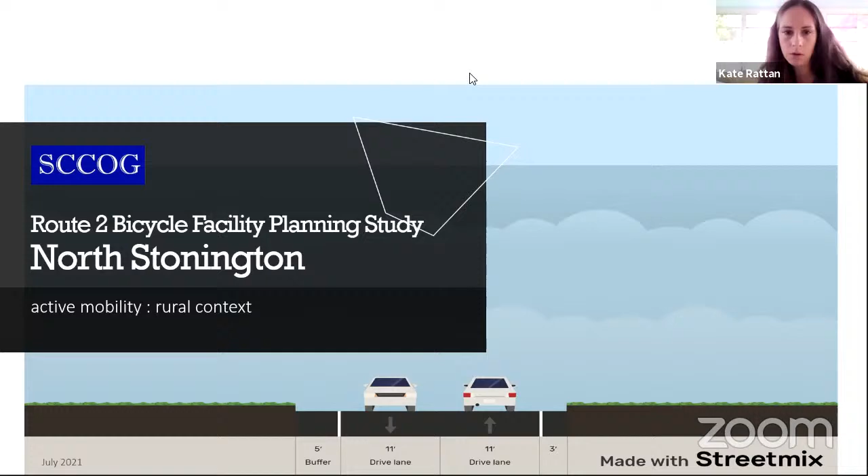Thank you. I'm Kate Rattan from Southeastern Connecticut Council of Governments, and I will start the presentation. We perform the functions of the Regional Metropolitan Transportation Planning Organization, and we are pivotal in trying to program some federal funding for transportation.

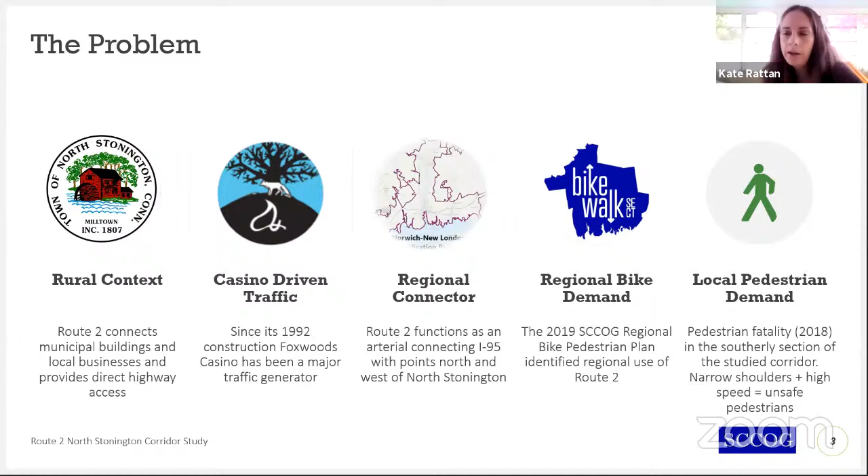This particular project brings together a number of different groups dealing with this problem. We have the town of North Stonington, which is primarily rural. We also have the casino, which is driving a lot of traffic in the region. Route 2 is a regional connector, but we also want to accommodate cyclists, as we saw during our 2019 bicycle and pedestrian plan, and we want to accommodate pedestrians for making local intra-town trips.

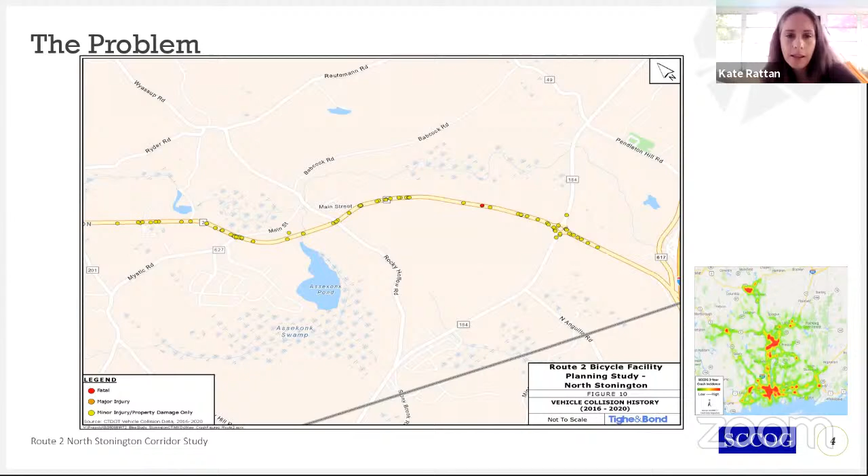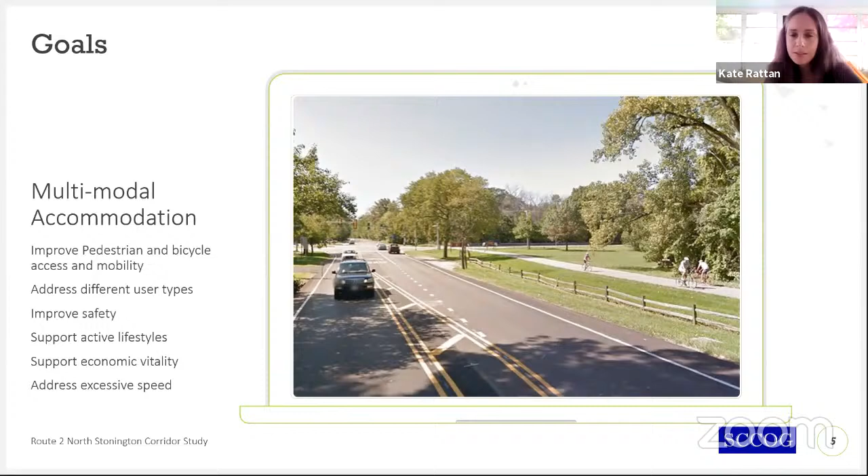Our goal is to provide multimodal mobility that is safe, and that is at times a tall order on Route 2. Some of the challenges are a narrow right-of-way, particularly difficult in the southerly part of the corridor, which extends from 184 up to Holly Green Plaza. We also have utilities along the rights of way, including aerial electric, storm sewer, and gas. Because this is a state route, we have to deal with DOT. They do the plowing predominantly during the winter, and they get to choose what standards we use on that road, but it also performs critical local functions for intra-town mobility.

So you guys are also stakeholders. We have some opportunities. There are some signal upgrades happening now through DOT. We also want to time improvements to make the most of the vendor-in-place paving that DOT does, and make use of any maintenance activities we can get DOT to do. We want to make this corridor more accessible for people to access the natural environment, the recreation offerings you guys have, the schools, businesses, and to create more linkages to enhance economic development.

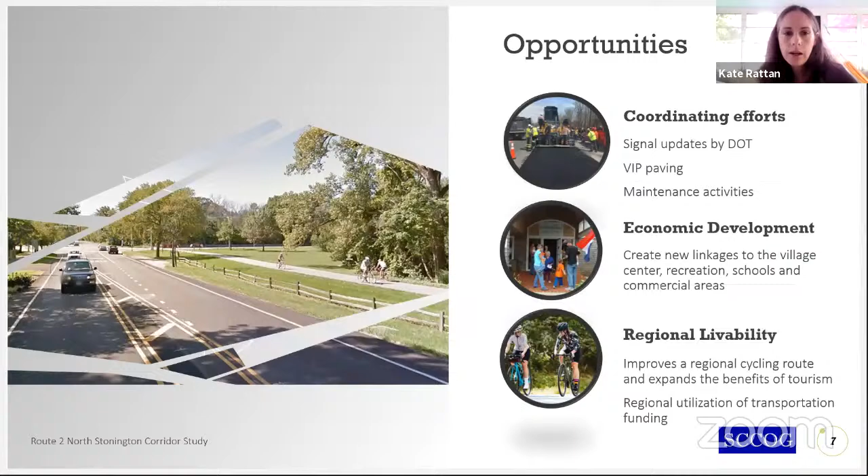We were tasked with this a couple of months ago to look at how we could better accommodate particularly bicyclists and pedestrians. We have to use a multifaceted approach in the central section between the southerly termini of Main Street and the northerly termini of Main Street. That is really a critical area where it should be walkable, and we want to provide a separated path for people and also for cyclists. As you diverge from that area, we think most people can be accommodated with a wider shoulder made safe through the use of buffering.

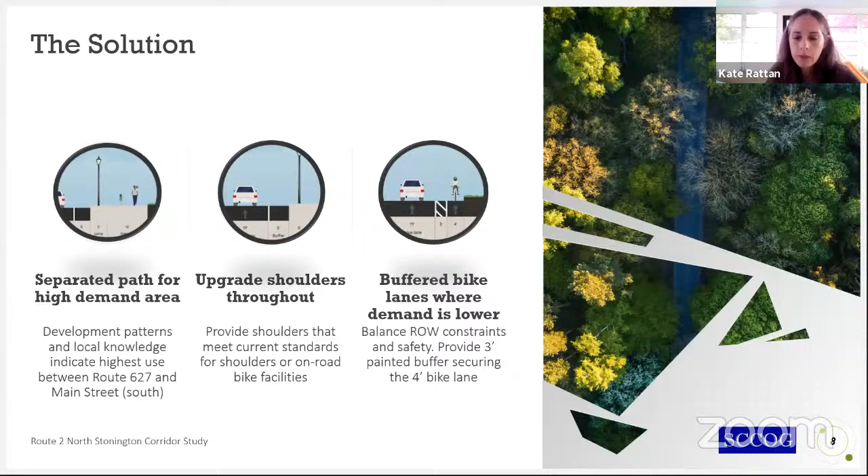This is an explanation of the different modes we'll use going from north to south. Up near Holly Green, all the way to Holly Green, we'll have a wide sidewalk, a 12-foot sidewalk, which could be plowed with a pickup truck. We'll also have shoulders made more regular so we can improve driver expectations and provide safe space for people who don't fit on that sidewalk, maybe people starting out in the opposite direction who are having a hard time crossing, or for through cyclists who would prefer to stay on the road.

As we come into the central section of the corridor, we would be looking at trying to encourage people to use that sidewalk as opposed to the shoulder. The shoulders would be made consistent with a 5-foot shoulder, which is current standard. Then as we move south, we would pick up that buffered shoulder again, and lead that all the way down.

Then at Jake's Place, which you guys will be familiar with, the termini of the commercial section of that center phase, we would drop the sidewalk because there's really lower demand in that area. We want to provide a better shoulder. In some areas there's less than 2 feet out there right now, so this would be a significant improvement for safety for vehicles as well as for cyclists and walkers.

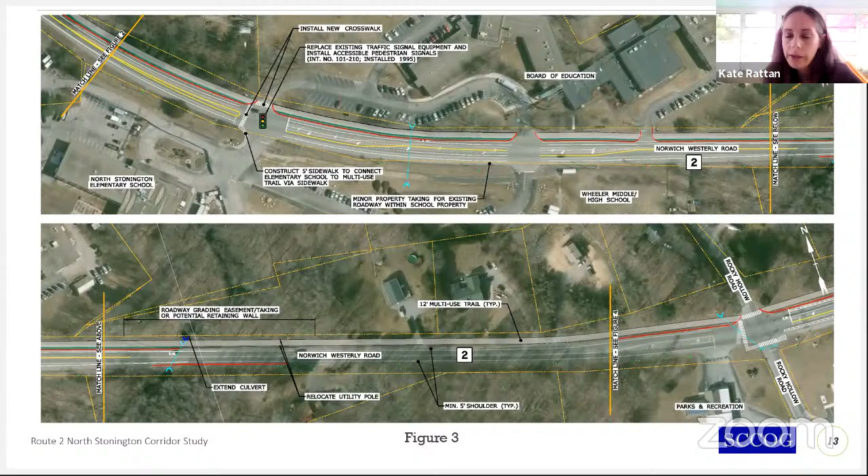Coming down further, looking at doing a little bit of work at the Rocky Hollow Road intersection. This is one that the DOT is already working on, and we've coordinated with their traffic designers to enable their upgraded rehabilitation plan to accommodate what this plan says here.

As you come down at Rocky Hollow, we're going to pick those shoulders, the buffers, up again. That's because there is no way that we can create a safe crossing at the southerly termini of Main Street. It's just not possible. It's not signalized, and it's on a curve. It would be very challenging.

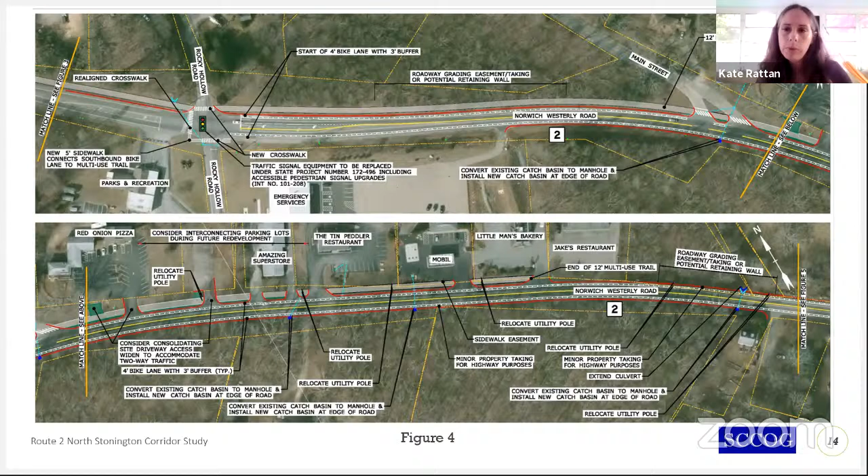So we're going to keep the multi-use path all the way to Jake's Restaurant. However, we're going to pick up those buffers so that people can choose, if they're going to a point south of Jake's, to cross at Rocky Hollow and keep on going south.

As you see, a significant amount of the widening is shown in red, and it's in this section, the southerly section, because it is quite narrow through here.

The cross section that we are anticipating really does thread the needle of cost benefit in terms of utilizing as much as we can the right of way that we have already developed, in order to get a safe accommodation for all of the users in here. But we do have to widen the shoulders slightly through this.

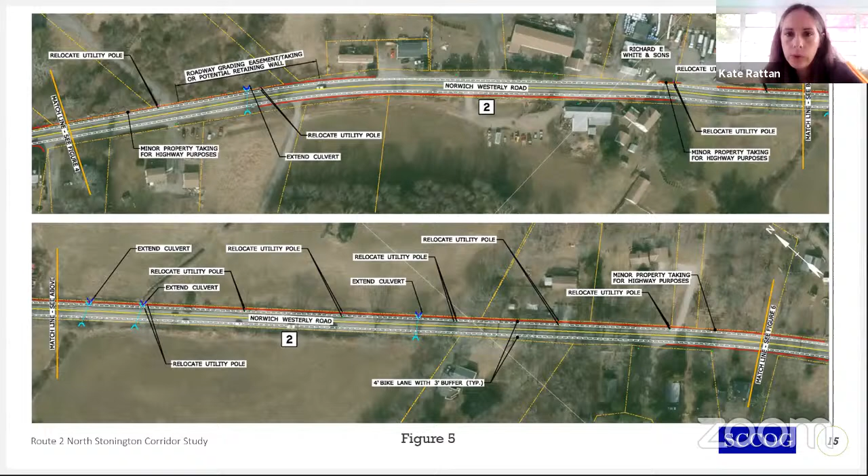We did look at the wetlands layers, and we are well aware that there are drop-offs and open drainage that need to be accommodated through here. But this is reflected in the cost that you'll see.

As we come into the roundabout, this was brought up as a desire: how can we create more of a gateway, and how can we slow traffic through here? That's a project unto itself, and it was outside of the scope of our work here, but it is not outside of the scope of the region's ability to push for change up at DOT.

This is kind of an old school model of roundabout design, and it's very, very large. There are opportunities to kind of shrink that roundabout and slow traffic through that area, which would allow better opportunities for multimodal mobility, but that is outside of the scope here.

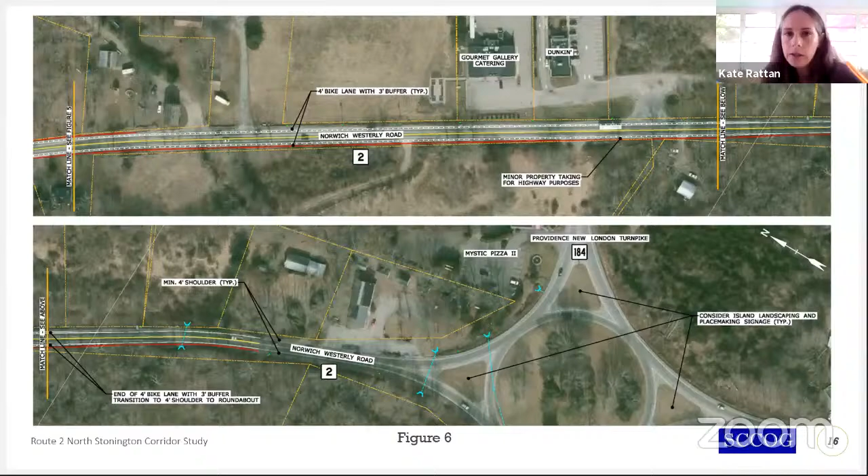We have a preliminary design estimate, so take it with a grain of salt. The full project comes in at about $8 million.

That first phase is the bulk of it at 2.6 million, and phase 2A, which is in the north section, is 1.8 million, and phase 2B, the southerly section, is 3.47 million. The southerly section really has the bulk of the cost because we're doing a considerable amount of widening there. What we did do is break out the multi-use path all the way to Jake's, so we see the benefit of that in phase 1 and not in phase 2B.

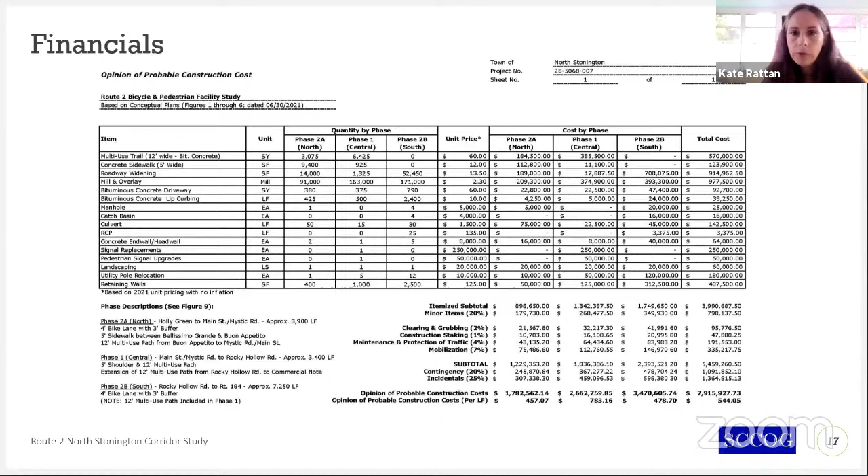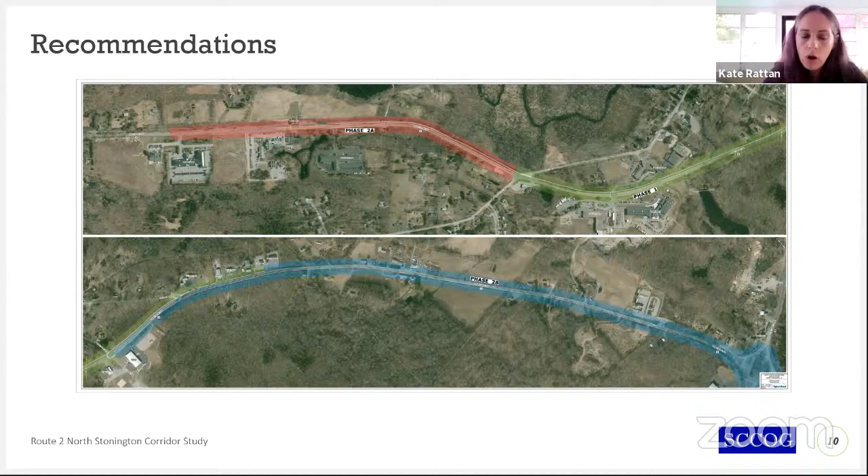I'll just jump back to the phasing for one second. As you can see, phase 1 goes from Main Street north, and then down to Rocky Hollow, but the multi-use path goes all the way to the termini of that path. We did that because the local benefits will be the highest that way.

Just in terms of a timeline, in October we heard from Mike that Selectman Urgo would like to see us look at this issue. We had a consultant on board and scoped in February. We did some stakeholder outreach with the town and DOT in May, and we've got this final plan here in June that we passed along to the town. After this engagement with the Board of Selectmen, we'd like to reach out to DOT and do the same type of presentation, and then get this programmed.

The construction timing depends a lot upon both the town and DOT. We have two different levers. We can use STP funding for this project, but that will take longer. If you want it to go faster, you could push forward with a LOTCIP project and participate in the cost of it. However, if we are only using federal and state funding, things may take longer. We have other priorities in the region as well.

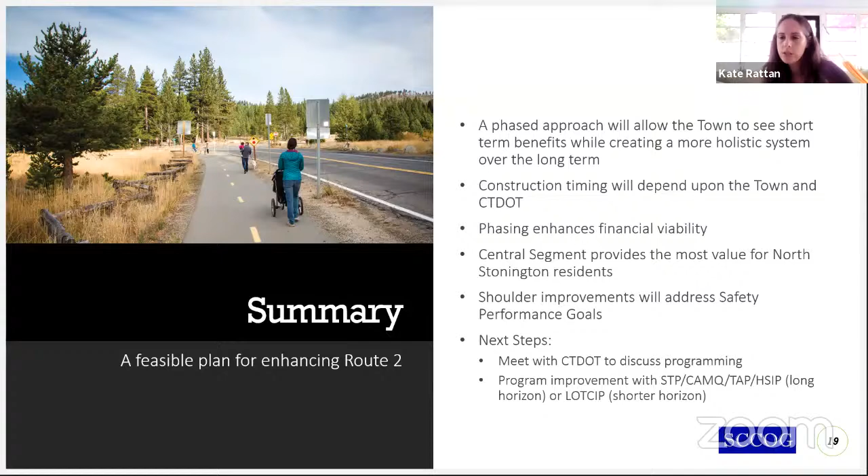So it's all in the hopper. We tried to phase this so that it creates financial viability, because the whole scope is very large and we need to break it into a couple of pieces. There are a couple of different federal programs we could tackle: surface transportation, congestion mitigation and air quality, transportation alternatives program, or HSIP. I think particularly for the southerly section, we may be able to try and use some safety funds.

I just want to tell you guys that this was a team effort. FHWA provided the funding, DOT provided both input and support for the project, and our consultants were excellent. We had Chris Granatini on from Tighe and Bond, and they were very, very helpful. I think they've provided a good product. I hope you guys all read it, it's only a couple of pages. That is my presentation.